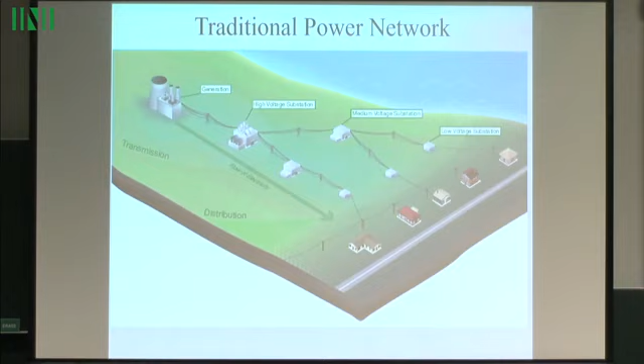So this is what people call a fit and forget power network, a traditional power network. There are two main characteristics of this power network. The first one is that usually the energy is being produced far away from the end user. And secondly, the flow of energy is only in this direction, from the power plant to the end user. I think that several speakers have mentioned various problems with these power networks. I think it's pretty much obvious that you'll have losses. It's a very old network and so on.

Now, some people, especially power network operators, experts, they will say that this is not exactly true, because not everyone will charge his or her own vehicle at the same time, at the same rate, and so on. Absolutely right. We must see the average picture. However, as we buy more and more EVs, this will come closer and closer to reality.

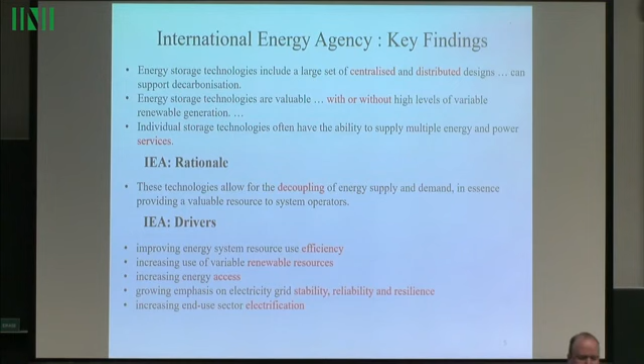This is really important. You have smart sensors everywhere, and you can isolate parts of your network if something goes wrong. So the challenges and the flexibilities here are huge. For example, you can go to a big industrial plant and combine it with a set of renewable energy sources and energy storage, and make it behave like a virtual power plant. So for the rest of the network, this can be seen as a virtual power plant.

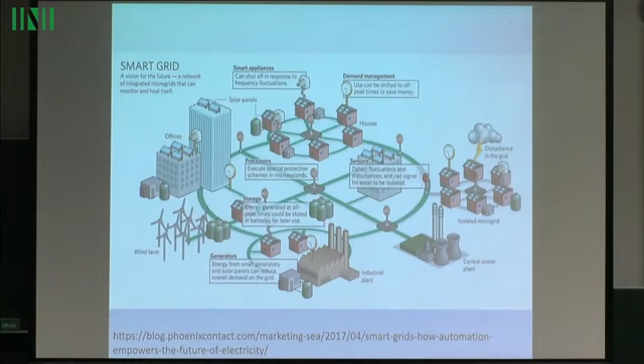This is a very nice figure. I really like it. I show it to my students, very nice, but not very practical, I have to be honest. I like to see what a smart grid is from a purely systems theory point of view. And this is what I think a smart grid is. And through that, we will be able to see the research challenges. You start by having the traditional power network. So all the problems and the design questions that we know from previous years still apply here.

But now on this network, you add something else. You add energy storage, you add demand-side response, and renewable energy sources. So now you add more questions. Where are you going to place your renewable energy sources? What types of storage are you going to use? How can you change the business model to achieve meaningful demand-side response?

And now on this very complicated power network, you add another layer. You add an IT network. You have all of these smart sensors, and they exchange information. So research questions there: fast and secure communication, cyber security, and so on. And on top of this very complicated thing, you add a control network. And this is my background, so I left it for the end, okay?

So you now need to control all of these assets. How are you going to control it? So what is the energy management strategy? How are you going to control which assets will be on, off, and so on? Not only that, what type of controller are you going to use? Are you going to have one big central controller here, or are you going to have several local controllers? What is a local controller? Will one controller control one asset or several assets? So we have theories here like multi-agent systems, network theory, graph theory, that can be really helpful.

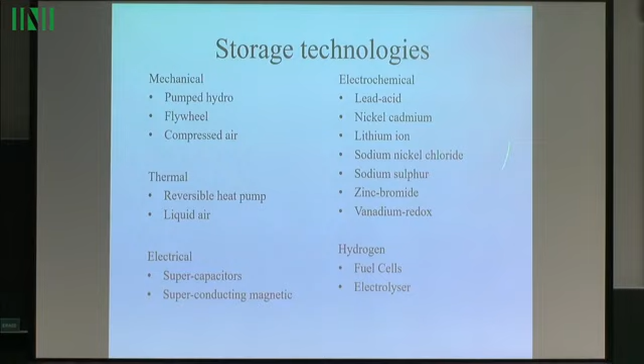Very briefly now, regarding storage technologies, I have grouped them here into 5 different areas: mechanical, thermal, electrical, electrochemical, meaning batteries effectively, and hydrogen, even though you can group them in different ways. All of these different types of energy storage have different properties, like energy density, power density. So for example, a supercapacitor has high power density, but not so high energy density. Efficiency, response time, and so on.

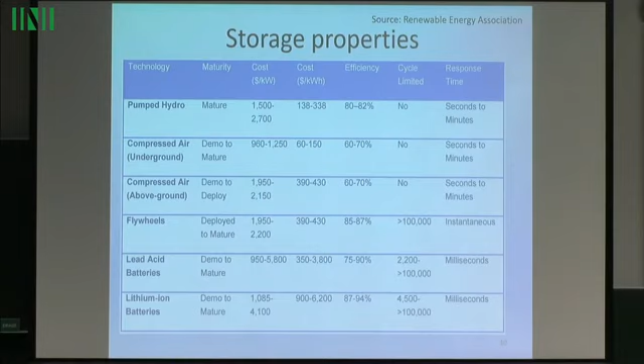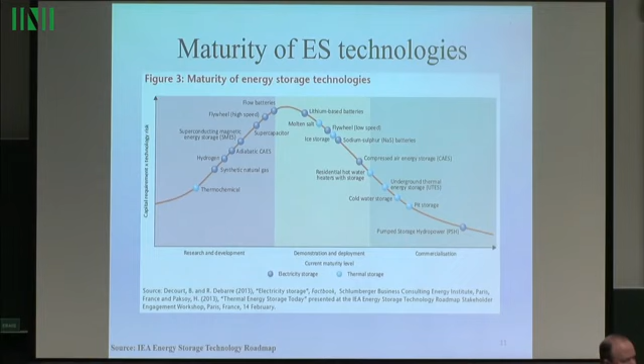I think one column here that is hugely important is this one: how mature is a specific technology? So again, from the same report, we can see that some types of energy storage, like pumped hydropower, are very well known. We use them all the time. But some others, like for example superconducting magnetic, we are not so familiar with in the area of energy storage. So we have to choose very carefully which energy storage technology we're going to use.

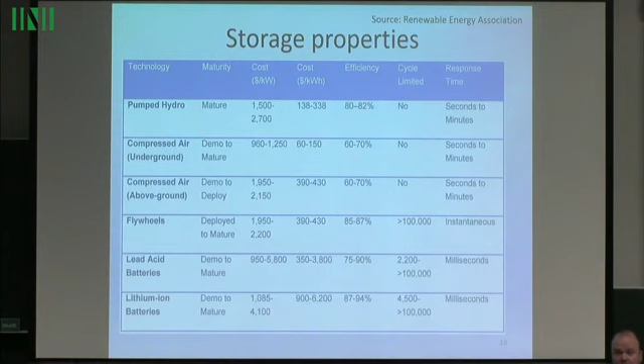And now we go to something even more complicated. We go to hybrid energy storage systems. Why hybrid? I previously said that each technology has its own properties. So how about if I combine 2, 3, 4 different types of energy storage, and by doing that, you have the benefits of all types, okay?

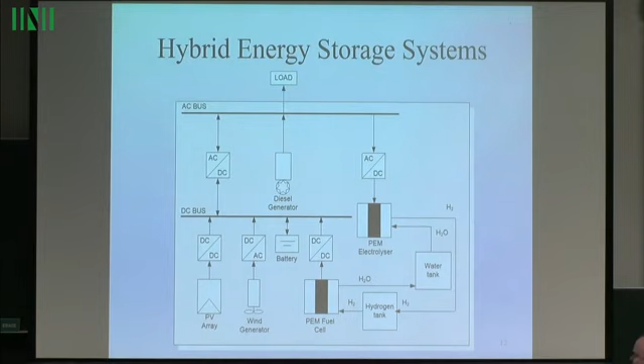So this is the first energy system that I did some work on 6, 7 years ago, I think. I had to design, model, simulate, build, test and eventually optimize this isolated microgrid. We can see that we have renewable energy sources, and we have this as a backup, obviously. We have the battery here for what people call short-term storage. So you charge it during the day, you use it during the night. And then once this is completely full, you can make some hydrogen here, store it, and then use it later. This is for long-term storage. So for example, you can create some hydrogen during the summer and use it during the winter.

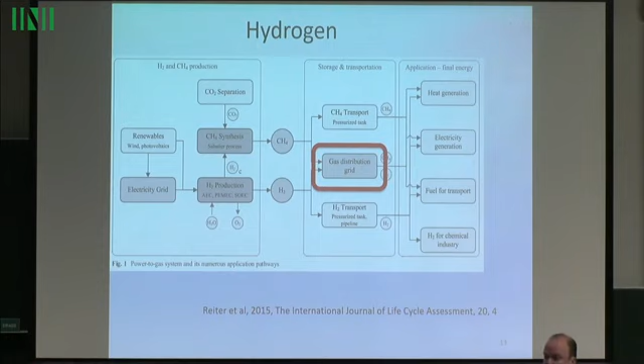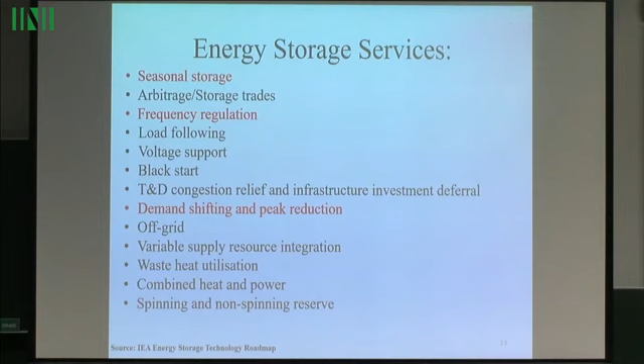Very important to see the services that we are going to offer. So how can you choose better our services? Again, stolen from this report, you can do all of these things. I'm just going to focus on 3 main topics. I think the first one is pretty much obvious. You store some energy when you have surplus, and then you can use this after days, weeks, months, and so on.

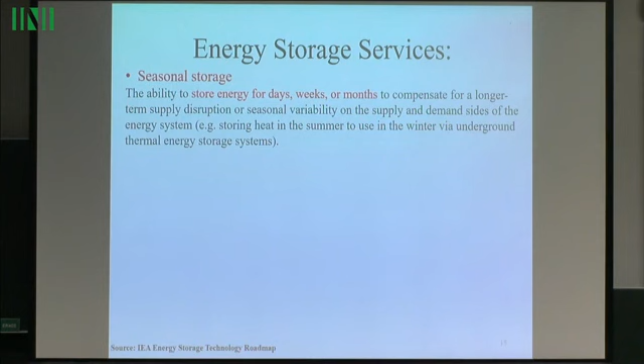Frequency regulation. For the non-experts, very, very briefly, if you have an area of your network where you produce more energy than what you consume, it is possible for the frequency to increase, and of course vice versa. So you need energy storage to avoid this problem.

Demand shifting or peak reduction or peak shaving and so on. If you can predict that after a few hours you are going to have high demand, it is possible to use this stored energy in order to make sure that the DNO will not see this high peak.

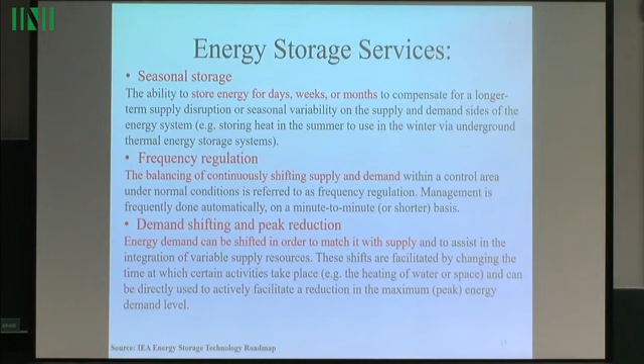So a few things now about Newcastle. I can see several people here, and of course Chris here from CESI. CESI is the National Center for Energy Systems Integration. 4 main universities, strong links with industry. Our main aim there is how to integrate different energy carriers. How can I combine gas, heat, and electricity, for example? What are the benefits? What are the challenges?

People talk about time constants, okay? Imagine that these networks have completely different time constants. What will happen when you combine them? How can you build new business models? And so on. How can you study the social behavior of people, okay? So effectively, we try to do all of these things.

One thing that I would like to pause here for a few seconds is this one. I think living labs is something that will be extremely important in the near future. We're going to see very, very briefly how people can interact with all these technologies.

Okay, so also in Newcastle University, we are very proud of our facilities. This is our energy test bed. Effectively, you can test various types of energy storage, like various types of batteries, supercapacitors, and so on. You can connect it to the main grid, so you can send energy to the main grid, and you can take energy from the grid. I like this one.

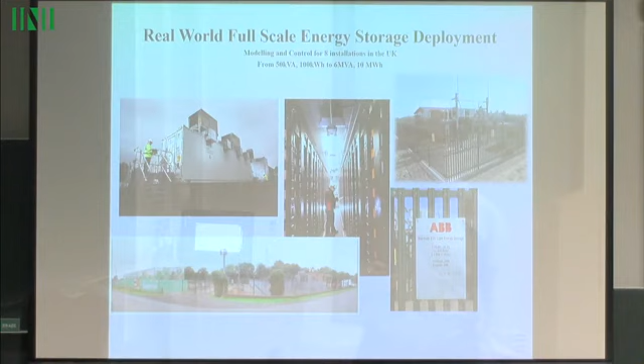I just wanted to say that we have been involved in some rather large projects where we installed large batteries. So how can we design, how can we choose these energy storage assets? And this is what we do in Newcastle. I'm more or less sure that everyone in this room who is a power systems expert will do the same thing. From our perspective, the first thing is we need to see what types of services you are going to offer to the end user.

So in this work, David, my colleague, took this approach, okay? Let's say that you commit to one specific service, peak shaving, for example. As we all know, we are not offering this service all the time. So the question here is, is it good for us to try and choose also at the same time other services?

And of course, in order to do that, we need to run several simulations. Well, most of you here are mathematicians, and you can imagine how many scenarios you're going to try and predict, how you're going to maximize your revenue and so on. Several people have said it already, but once again, for the non-experts, one key element here is statistics, okay? So most of you are experts in this area.

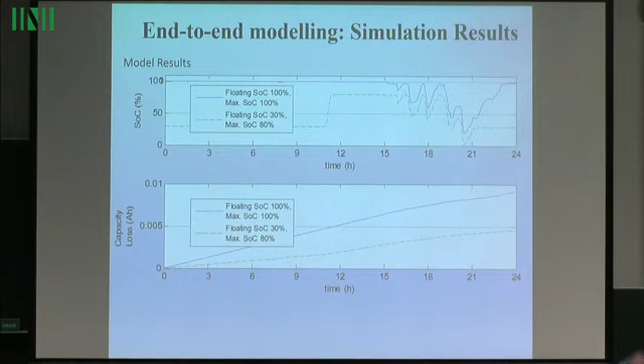So someone may say, okay, Damian, how about if I don't have a fully charged battery? You're absolutely right. But then, if at this instant the operator asks from you more services, you cannot offer them. So we have to be very, very careful of how we're going to design and control our system. Once again, optimization problems, stochastic systems, and so on. More results here, I can skip them. Yes, one thing that is very important and was contradicting the previous statement was that the efficiency was dropping when the floating state of charge was reduced.

This is something that I'm more involved in. I apologize for this one here. We try to use multi-agent systems, graph theory, network theory, propositional logic, and so on, to model and control microgrids or energy systems and their energy management methods. So this is the key point here. We do not only try to model the network or the grid, but we also try to model the control actions. And this is how you can represent this microgrid as a directed graph.

And these are some nice, elegant, for me at least, statements of how you can control these assets. By doing that, we were able to understand how complicated and uncertain systems behave. By understanding how these systems behave, we are able to offer more energy management methods. So in this specific paper, we took our previous system, we combined it with 2 other similar systems, and we tested various energy management methods. And these 30 different energy management methods were only able to be derived because we understood how the system behaves.

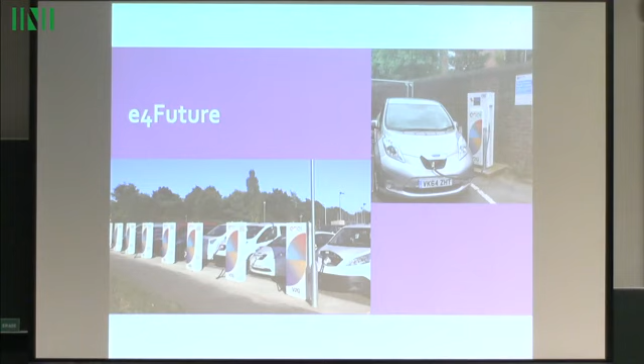And very, very briefly, only 10 seconds, about this project that has just started. It is in a collaboration with Imperial, DNOs and DSOs. We try to see now our EVs not as a big load, as you have previously seen, but as a mobile or a moving battery.

And once again, try to imagine the complexity and the uncertainty here. How are you going to drive your vehicle? How long, how fast, and so on. So all these things need to be answered by great mathematicians in this room. So hopefully I'm on time.